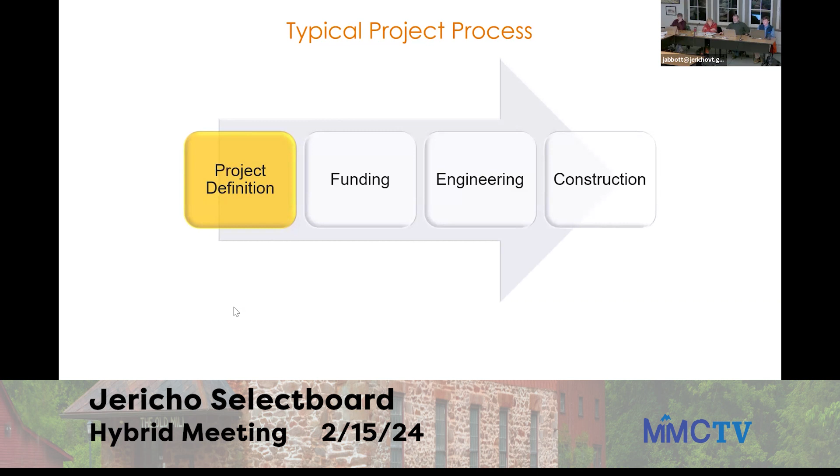So just taking a look at some of the areas along the study area, some of the different corridors. Vermont 15, the first part of it, starting from Griswold, going to Brown's Trace, had about 8,500 vehicles a day traveling along there in 2022. It begins with a 35-mile-per-hour speed limit and increases eventually to 50 miles per hour. It has 2 lanes of 12 feet width and 3-foot shoulders. 3-foot shoulders are generally considered inadequate for a bicycle lane.

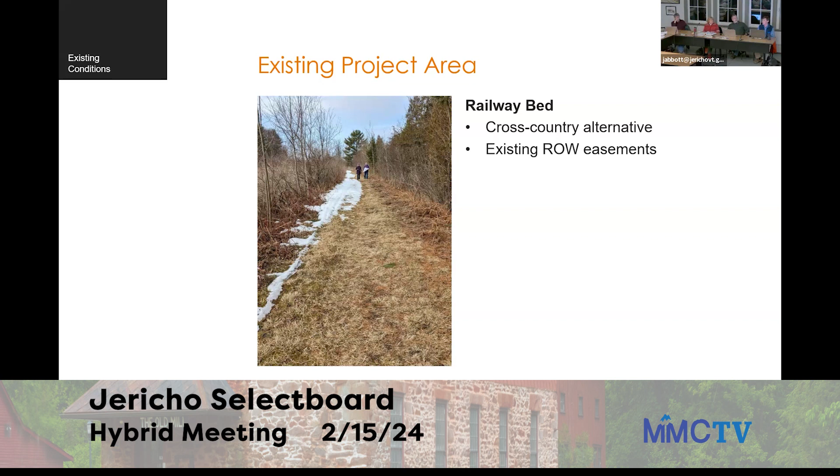Raceway Road itself has not quite 800 vehicles per day in 2022. 35 mph is the posted speed limit, approximately 24 feet wide, mostly gravel surface. There are some structures that get close to the roadway. Here we see a support structure for a barn that's about 10 feet off the roadway.

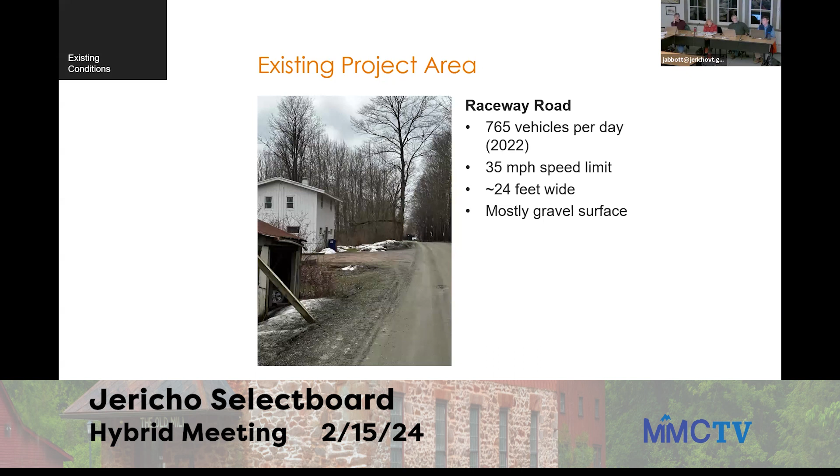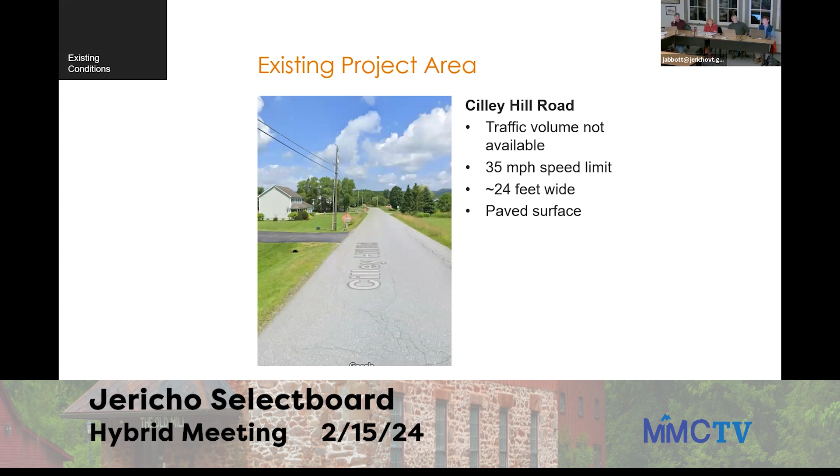And here we have a picture of Cilley Hill Road. It's a lower volume road, but we don't have a count indicating what the actual volume is. It is posted at 35 mph, again about 24 feet wide with a paved asphalt surface.

So I'll speak through some of the highlights. I'll read the purpose. The purpose of the study is to construct improvements that increase the safety and mobility of pedestrians, bicyclists, and transit users along this corridor, regardless of their age and ability, and also to encourage the use of non-motorized modes of transportation.

Some highlights from the needs. Land uses in the corridor do provide origins and destinations, but they lack the multimodal linkages, they lack links for bikes and pedestrians. There's a general lack of pedestrian connectivity along Route 15 between the residential areas and the nearby schools.

While experienced bicyclists do ride along the shoulders on Route 15, they are not adequate to provide safe and comfortable bicycle and pedestrian routes for the range of ages and skill sets of the Jericho cycling population. A portion of the study area along Route 15 is posted at 50 mph, and of course many vehicles are traveling faster than that.

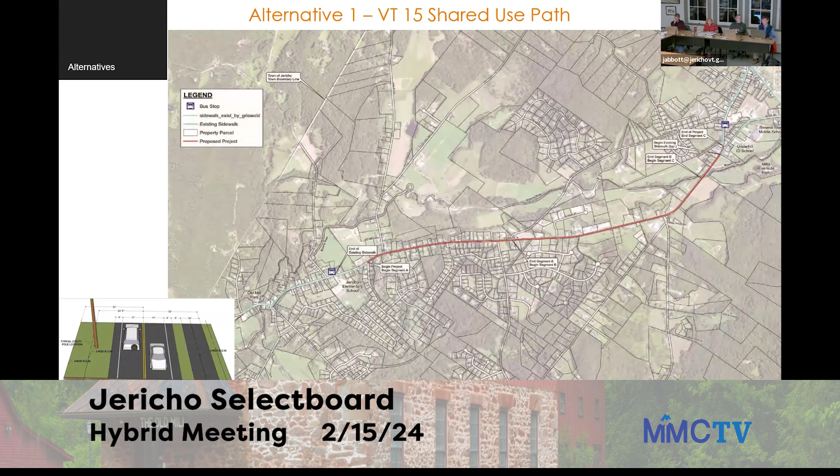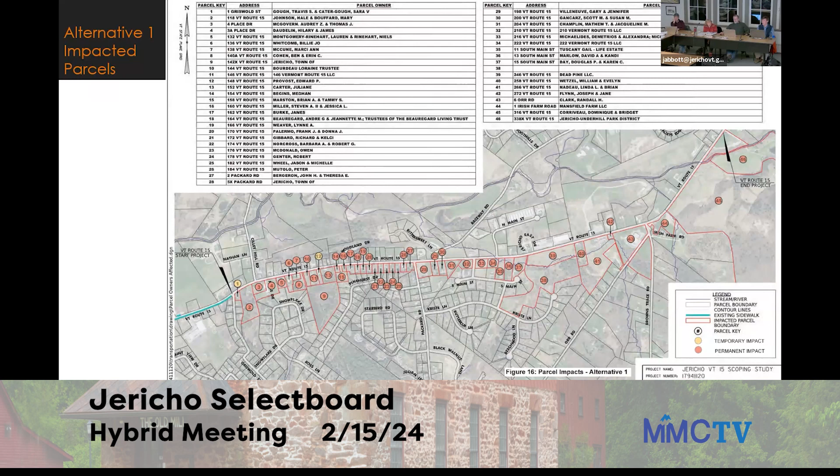This graphic identifies the properties that would be impacted by this alternative. Most of these are permanent impacts, a couple of these would be temporary impacts just during the course of construction. Later, at the end of the presentation, I have some backup slides if anybody is curious about what impacts would look like for any individual parcel. We do have some roll plot graphics that show that. But here we can see that alternative 1 would impact 46 property owners.

And so this alternative would begin at Griswold Street with a crosswalk over Vermont 15 to a new segment of 5-foot wide concrete sidewalk going along the northern side of Route 15 to Cilley Hill Road. Once you get to Cilley Hill Road, there would be signage and markings indicating that pedestrians and bicyclists are using this roadway up to the beginning of the railroad path.

And I'll show you some examples of those later on. Some of the slides after this one zoom in to some of the areas along this alignment. But generally it will follow the existing rail bed until it gets to Bittersweet Lane.

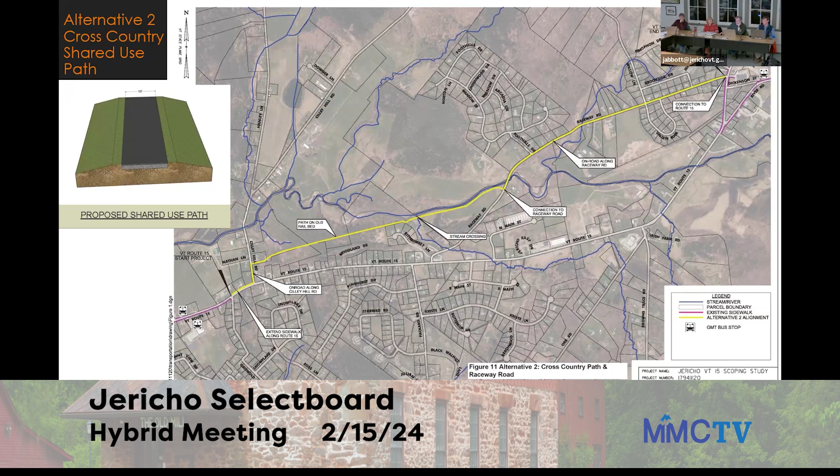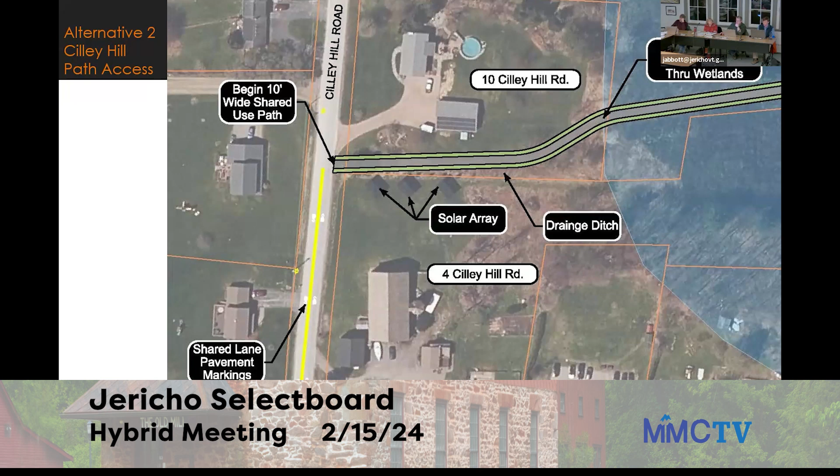Following along, eventually the path would reach the river, Browns River, just north of Bittersweet Lane. In blue, you see the parcel lines for Bittersweet Lane. As many are probably aware, a couple years ago, there was a lot of damage done, failure of the riverbank at this location, and there were substantial repairs made.

If this option were pursued, it would require a surveyor to go out and compare the land that's existing today with what is provided in an easement that covers the path in that area.

If need be, the path could be narrowed along this portion from the 10-foot wide path to an 8-foot wide path. As it passes this area, it would cross over an unnamed tributary to Browns River by way of a 16-foot timber bridge crossing. You can also see an existing leach field pointed out, a mound system, and that's another constraint in this area.

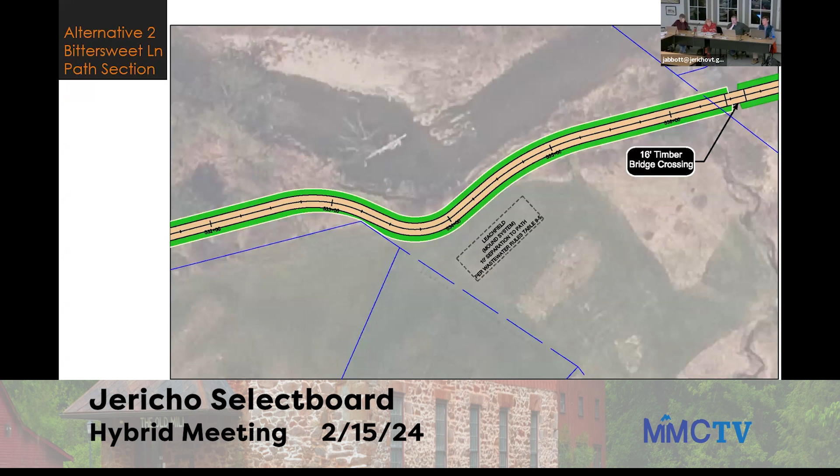So there are several constraints in this portion that would need to be worked with. Zooming out, this is the remaining portion of path taking it to Raceway Road.

You can see on the left-hand side that 16-foot timber bridge crossing that I just mentioned. From there, the path would follow as close to the river as possible, trying to minimize impacts to the existing agricultural fields that are in use.

The path for that portion would be built such that it can handle the load of agricultural equipment for haying those fields.

The yellow line represents the limit of the floodplain, and as you can see, the path goes right through the floodplain. So there are a few different ways that can be dealt with.

You can build a path that's resilient enough to be flooded on occasion and then allow the floodwaters to recede. You can also build it up with some hydraulic structures to aid in getting those floodwaters removed more quickly. Another option would be to use a boardwalk.

Generally, if the path were built in this area without bringing in any new fill, that would be the best option. If you do need to bring in more fill, then there would have to be an analysis performed as part of the design process, looking at how the floodplains were determined originally and looking at the impacts of the construction project and how to deal with those.

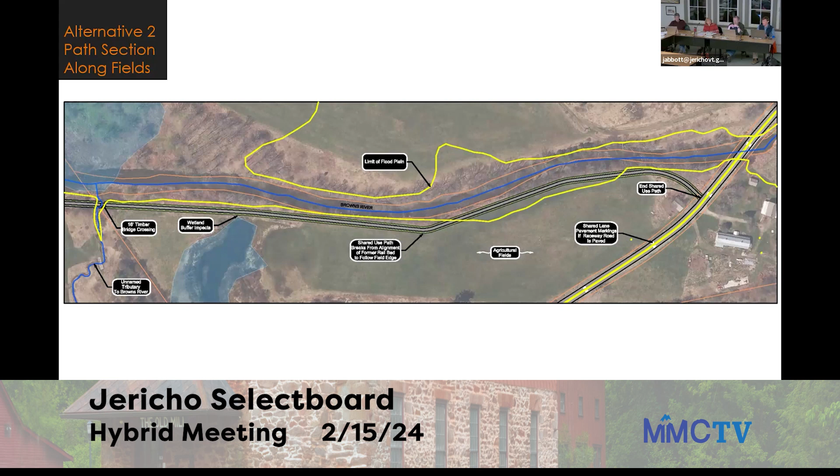For example, speed feedback signs. If you get to the point where there seems to be traffic that just doesn't want to be calmed down, then there would likely be funds available. This could be a question for the RPC, but we've done this for other communities where you can perform a speed study and come up with site-specific traffic calming measures to help along that specific corridor.

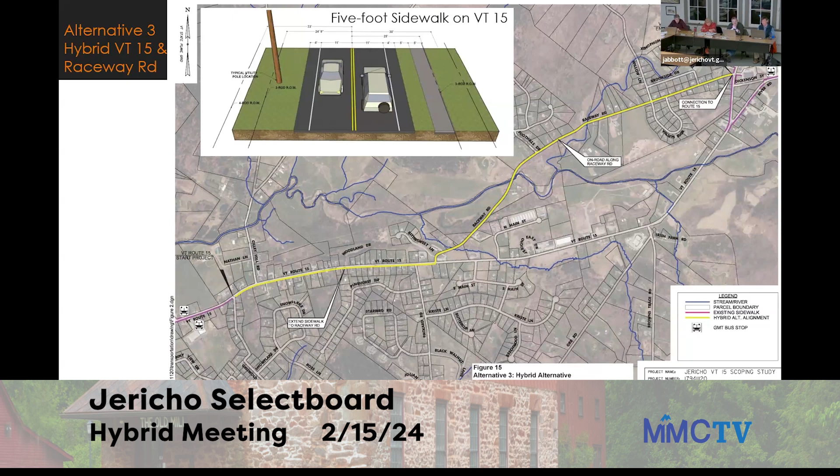This next graphic identifies those properties that would be impacted by this hybrid alternative. It would be 29 properties, 2 of which would only be temporary impacts during construction. If there are questions about what those impacts might look like, I have some backup slides at the end of the presentation that show those more clearly.

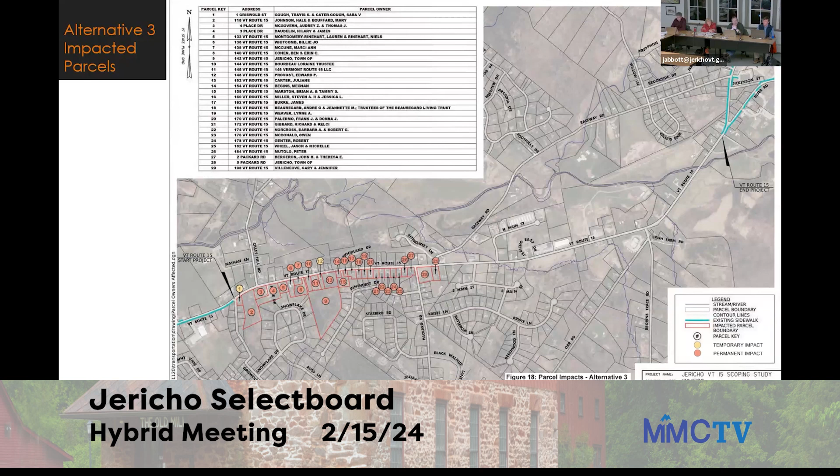First off, project costs. The total project cost for alternative one comes to $2.8 million. Project costs for alternative two, the cross-country alternative and Raceway Road, comes to $2.3 million. And the hybrid option comes to just shy of $1.3 million.

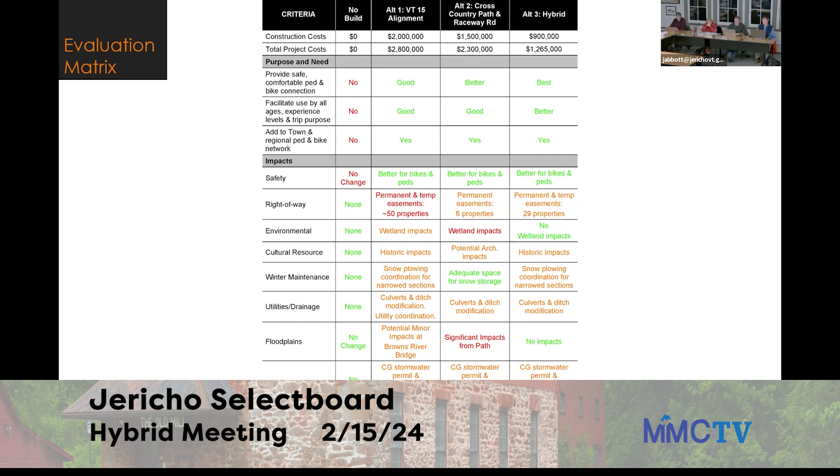It's the lowest cost. It meets the purpose and need. It extends the sidewalk network from the existing terminus at Griswold Street through the area of highest residential parcels along Route 15 in this section. And it has fewer impacts in many of these key areas that not only add cost, but also add time to the development of projects.

So the next steps would be for us to seek the endorsement of the select board of the recommended alternative, to then finalize the report, basically saying as much, and then pursue grant funding for design and construction.